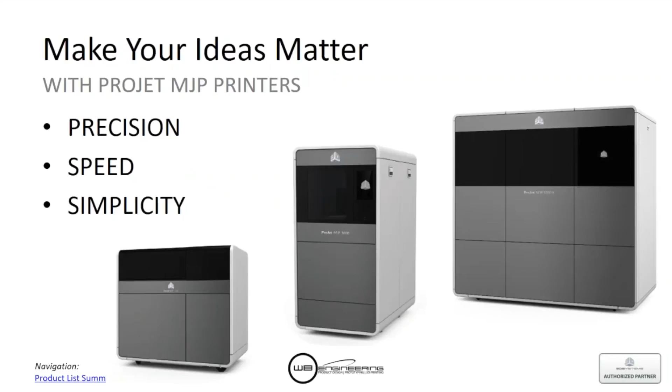So these are the three models that we're going to be going over today. These are known for their precision, the speed at which they print at, and how simple they are to use. Starting from the left, we have our ProJet 2500 series. In the middle, we have our ProJet 3600 series. And on the far right, we have our ProJet 5500X.

So we're going to start off with what's happening with multi-jet printers, right? Why would you have to use these kind of printers?

So we use it internally to help expedite our design process. The biggest thing we found is it accelerates our time to market. We can iterate very fast, innovate better. Therefore, if we have a meeting with one of our customers and they have some suggestions, I sit down with our engineers here and we can toss around a couple of ideas.

Even if we don't agree on the ideas, we can go our separate ways, 3D print them, and then come to the table with actual physical prototypes the next day to see which idea actually works better and then move on from there. The beauty of this is once you design it, the actual fabrication of the part is automated, so you don't have to worry about a machinist.

You don't have to worry about dedicated staff. You just simply do the design work you're already doing, but you get the goal at the end where you actually have a physical part that you can hand over to your fellow engineer to debate the pros and cons of each one of your designs and then move forward. So there's no real hands-on time and labor time that you have to really put into this. It's relatively insignificant.

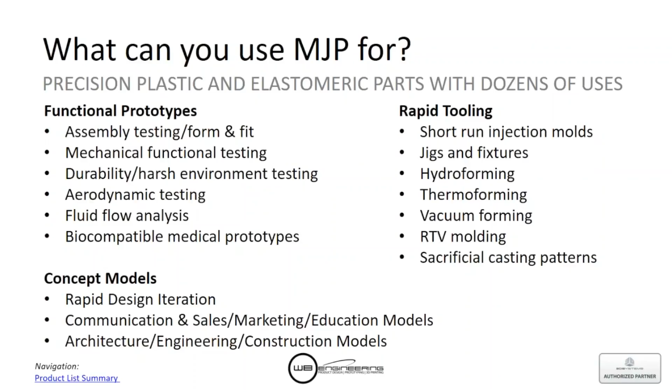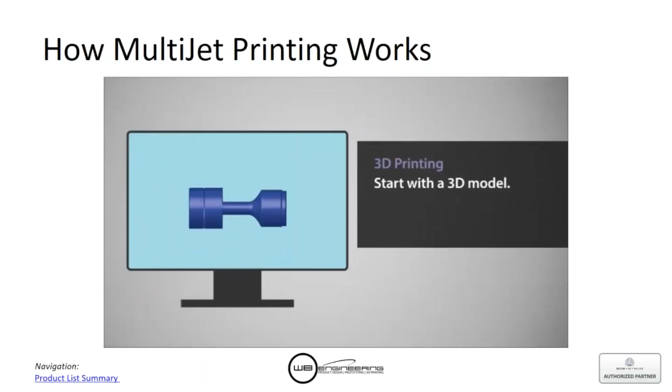Now, that said, there's always certain limitations. So I'm going to show a quick video on how MJP printing works. There's no audio to this, that way you guys can hear my joyful voice over it. But anyway, in general, you get your 3D file, you submit it to a modeling client.

It'll actually then split it up into layers. Once it slices it up into layers, it sends it over to the computer inside the printer. Then what it does is it actually starts laying down 2D images of each one of those, just like it would a 2D printer.

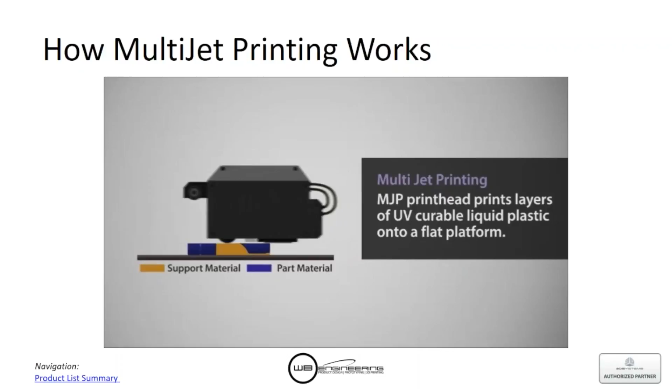We actually have over 600 jets inside of the print head, and it starts laying down part and support material as it starts printing. As it prints, the print head starts going up. In some of our printers, the build plate actually starts going down. So that's one variable there.

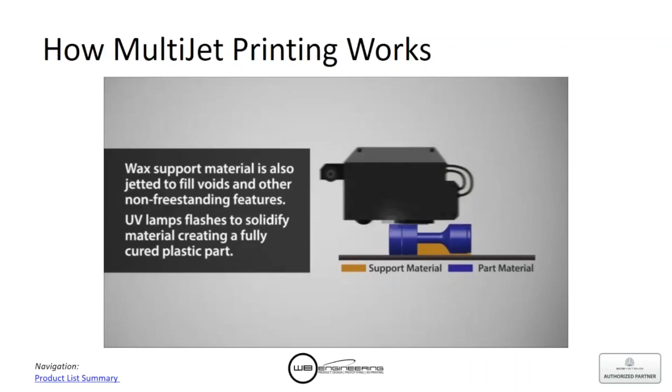So the support material in our situation is wax, and the blue material shown there is an acrylate photocurable resin. The good thing about this is that the acrylates come with different types of mechanical properties, also different colors if you need something that's clear. We have things that are ABS-like, polypropylene-like, etc.

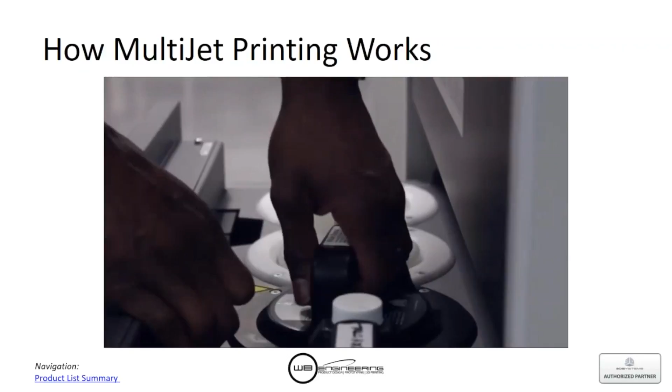Right here you're seeing how it is to refill your machine. You notice there's actually 4 containers there. This specifically is on the 3600. That's how you actually refill your machine and get rid of the old material.

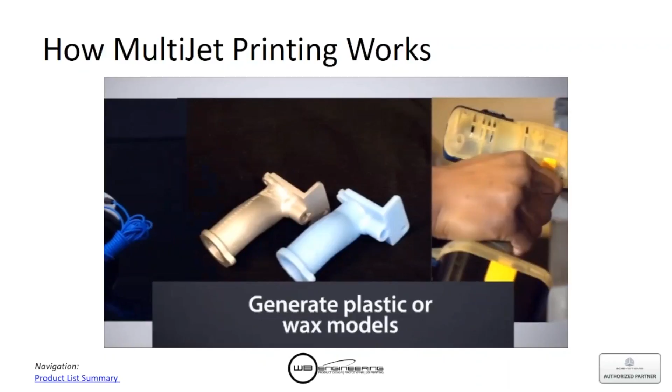This is actually a 5500 in action. You notice the white support material, the kind of amber-colored acrylic material. This is actually on a 3600, slightly different setup. In general though, you notice that we can do wax patterns and have them cast. We have functional, rigid plastic parts, and we can do very small, complex parts as well.

Okay, so what makes MJP better, right? So why are we looking at multi-jet printing over other types of technologies, right? So multi-jet printing is something that can produce extremely high fidelity parts. You can also produce very small, fine features, extremely easy to post-process, and you have more geometric freedom.

So unlike other technologies where you have breakaway supports, wash-away supports where you need to actually use pressurized water, all you have to do is put this inside of an oven and it actually melts away. So you're able to do very, very complex internal structures. You don't have to worry about overhangs, things like that. You're going to get the same accuracy and surface quality on any type of geometry that you send to this machine, which is incredible.

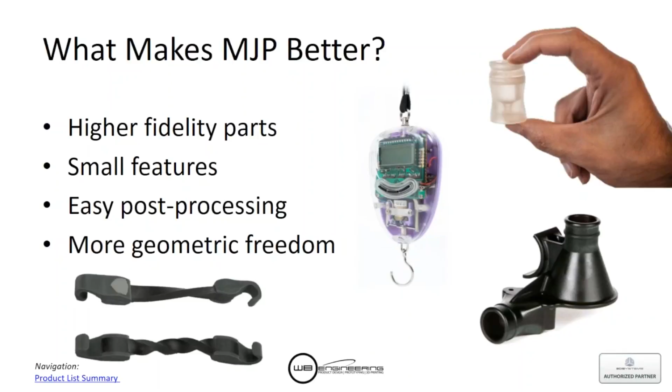Next up is us compared to other jetting technology, right? So if you notice the holes inside here, you'll notice on the left is our multi-jet printing technology. On the right is what's called polyjet printing. There's a significant resolution difference between multi-jet printing and polyjet printing. I'll get into details as to why in a bit, but you can notice just off of this image

there's extremely sharp corners in our parts. All the edges are visible. You can even make very, very fine geometries. It's easy to post-process. All the support material is gone. So it's very, very good for very high-resolution applications.

This is another one that was taken off of a case study from one of the customers. They actually produce irrigation systems, and they needed to come up with a spray pattern. They actually had to go with a multi-jet printer over a polyjet printer because the polyjet printer was giving them false results. So this is actually what we would call a false negative. The person actually designed the part properly.

When they 3D printed it and the 3D print came out slightly out of shape from where it needed to be, the jetting pattern of the irrigation system was actually wrong. So it wasn't necessarily because the geometry of the design was wrong, it was because the 3D printer was not capable to produce the geometry that was needed.

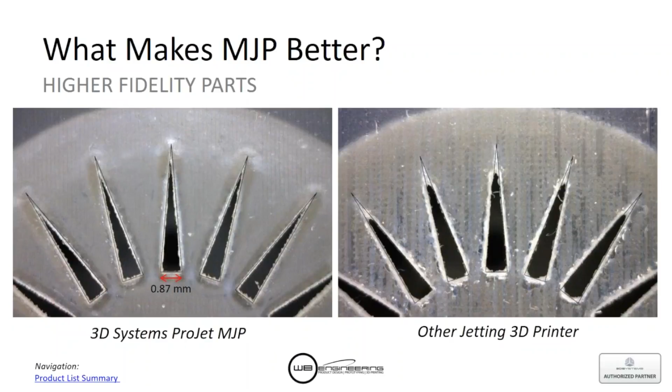So therefore, this fine detail, though it might sound like we're nitpicking, could mean the difference between false positive or false negative, which could be very, very detrimental to timelines and costs. So, you know, the devil's in the details, and therefore we try to embrace the fact that we can do very, very tight corners.

So how does our jetting technology do that, and compared to the other jetting technology, what's the issue? Well, we have what we call phase change material. So we have better droplet control. So this is an oversimplified diagram, but essentially when our material jets, it goes from a liquid to a solid as it's jetting. So therefore, we can control the geometry very well.

Whereas with the competing polyjet printers, they do not have a phase change material. So when the drop drops down to the build plate, the drop is actually not precisely controlled, and therefore not able to produce the sharp edges that we have in order to create that extremely high accurate part.

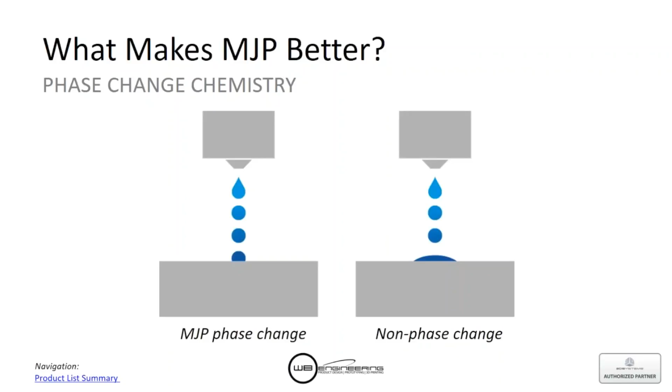So jetting is very important. We have phase change control, so the parts have very, very sharp edges, and our droplets are very well controlled because of the phase change process that multi-jet printing is able to offer over other jetting technologies.

Other reasons why multi-jet printing might be the choice for you guys. Post-processing, I got to say, is one of my favorite parts about multi-jet printing. Like I said, we've worked with a lot of different technologies here. Of all of them, multi-jet printing is the easiest to work with in terms of post-processing. Why do I say that?

Well, because in this scenario, it's hands-free, you don't have to worry about damaging the part. It's actually very fast. You don't require any type of plumbing, no chemicals, and we can do it in bulk as well, right? Let's compare that real quickly to other technologies. Simply, let's just talk about SLA.

Even if you're talking about professional level SLA systems or consumer level SLA systems, there's breakaway support, right, to one extent or another. The other thing is you have to put it through a wash, and then you have to UV cure it.

If you talk about FDM printing, or plastic jet printing, like 3D Systems would call it, there's also breakaway material, in some cases soluble, but the soluble is actually not what you would think, that you just drop it inside of a vat and it's done. It's actually overnight, and you might have to put it in an ultrasonic cleaner, you might actually have to scrub it after the fact, etc.

And now when you start talking about our other jetting technologies, those actually require water jets, some plumbing, so you do have to take into consideration certain things, and you also require chemicals for that as well. So in our scenario, you're simply just putting a part inside of a temperature-controlled oven. From that point, you just let it drip away, and you have a clean part. I'll show a video of that a little further on.

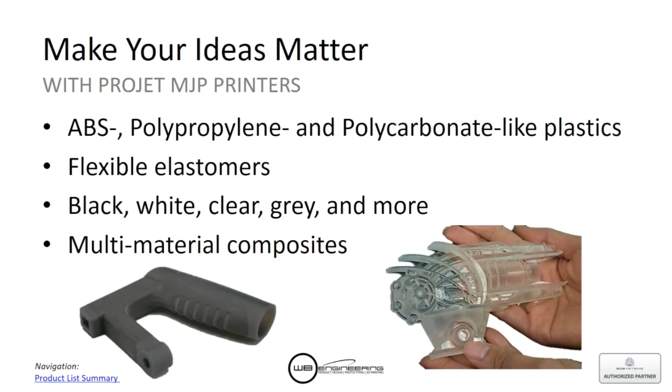So with ProJet printers, with MultiJet printers, you can actually create ABS-like, polypropylene-like, polycarbonate-like materials. We also have flexible elastomers, black, white, clear, gray, and we also have multi-material composites. So we can do 2 materials at a time, so that you can actually do, let's say, overmolding type applications, things like that. These are, again, the 3 printers in our line.

What I'm going to do is get now specifically into our ProJet 2500 series, which is this little guy over here on the left. This is our new product for the year. It's actually selling like hotcakes. It's very, very competitively priced. To create the type of precision that this printer actually creates prior to the beginning of this year, there's really no printer on the market that was sub 100 grand for that kind of quality. So this is really starting to bring the price point down on extremely high precision professional level printers that are built to last.

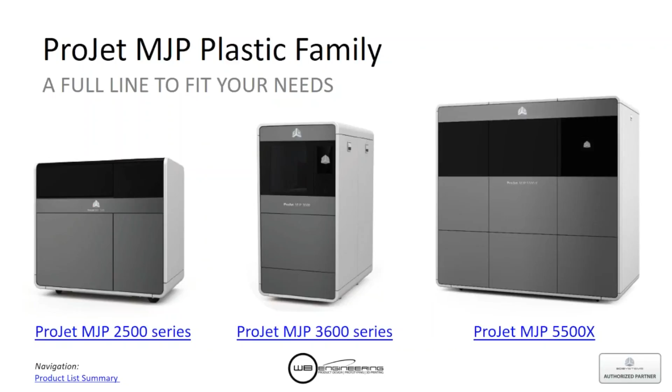So these are considered capital equipment purchases that will last you a while. So don't think of this as a printer that you're just going to buy and it's going to be obsolete in a little bit. These printers, they hold up to a beating. They're workhorses, and you can really run them hard without having to worry about them. So you get what you pay for. These are very well built machines that will last a good amount of time.

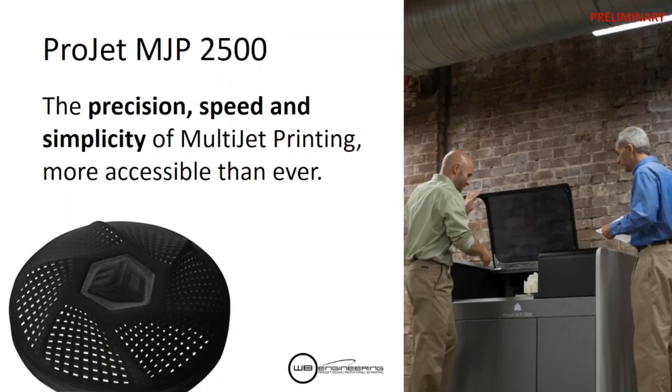So the ProJet 2500, best thing about it is it's almost as precise and accurate as our bigger systems. It has very high speed in terms of printing, and it's extremely easy to use, right? Let me show you a quick video from 3D Systems on this system in particular. That way you can see a little background about it. So that's a quick view of the 3D Sprint software. We'll go over a couple of the benefits of that software later.

That's the size of the printer. If you notice, it's about the size of a desk. It's quiet, so you don't have to worry about where you put it inside the office. As loud as it'll get is about the sound of a refrigerator. It's very, very clean. We actually have ours here in the office, actually 3 feet away from mine right now. So unless you have very good hearing, I don't think you can actually hear ours in the background.

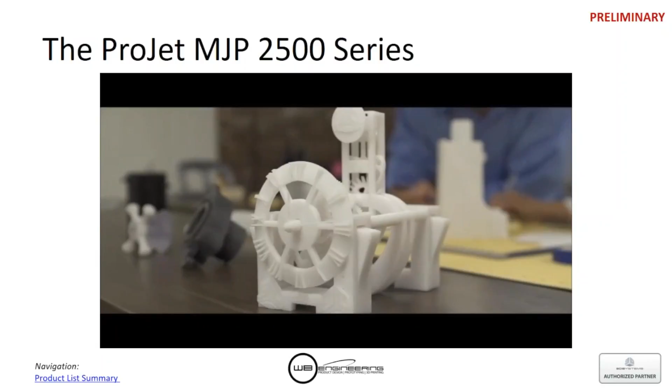So it's a very, very nice, quiet, clean machine, and it doesn't give off fumes. You don't have to worry about how it smells. Post-processing is very easy and clean as well, and the parts are very high precision, rigid or flexible elastomeric materials available for this. So what are the pros of the 2500? High resolution, high fidelity, and actually affordable.

So like I mentioned earlier, printers that create this kind of resolution and accuracy don't start to sell for very much under 100 grand, where the 2500 actually comes in significantly below that. So now you have access to what used to be a 6-figure acquisition at a significantly lower price, which is nice across the board. Even when you look at our competitors, you cannot get this kind of quality in that price point, period. The setup is very, very easy. I mean, it's comparable to, and even in some cases more simple than consumer level printers, right?

You can have this thing run 24/7, and it doesn't have to be taken care of. So, for example, a lot of the times what we do here, we'll have design meetings in the morning. We'll have our engineers implement those design changes during the day. We'll submit a print at night, and the next morning we have a meeting to review our parts. With this printer now, with the amount of speed that it has, if you have your file ready in the morning, in a lot of cases you can actually get it in the afternoon as well.

So these printers are actually starting to get to the point where you can literally have a morning meeting, and in the afternoon you can actually start to get some parts and look at them, depending on the size of the part, right? So we'll be honest with each other, if you have a massive part, it's going to take overnight to print. But if you're doing something that's really quick, small, you can actually get it in a very short period of time to review your decisions that same day.

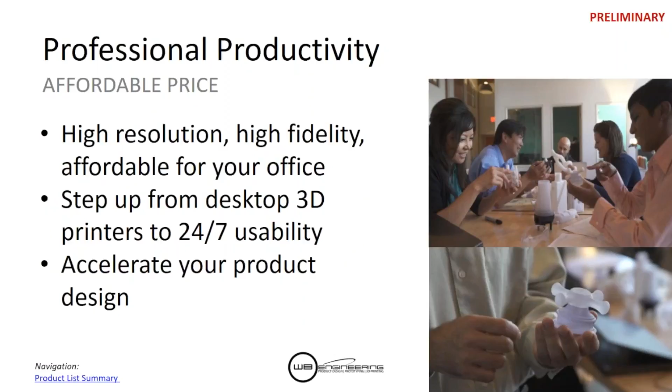Resolution, right? So in this scenario, I always like to compare this back to Apple, right? So Apple introduced the Retina display a few years ago at 300 dpi, which is more than what the human eye can actually notice, right? So we're actually printing with the 2500 at 790 dpi. So it has more resolution than the Retina display from Apple.

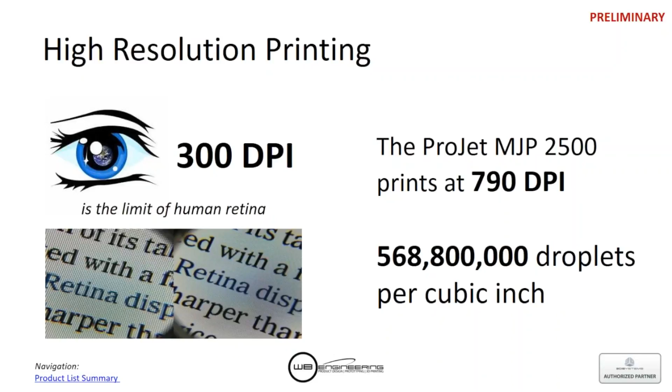So if you noticed when you looked at your screen as soon as you saw one of those Retina displays how crisp and clean that was, well, now compare it to something that's almost double what that Retina display was. So we're getting extremely high resolution, high fidelity parts out of these printers.

All right, next thing is network ready, right? So if you have a team of engineers that want to work on this, you can actually submit from your own desktop. It's a really simple client software that you can add to your desktop or your laptop. As long as you're on the same network, you can submit your prints from anywhere.

I actually have in the past been in my apartment, finished up a design, and submitted it from my apartment to get printed in the office. So it's actually pretty nice that you can do that remotely. If you're on the same network, you can manage queues, so if you need to prioritize certain prints, etc. So that's one of the biggest benefits that I see.

You don't need a dedicated PC either. So as soon as you submit the file, all the printer needs is power, and it'll go to the races. So it's not going to be taking up any of your bandwidth in terms of your computer. It'll be using its own processing power. You don't have to worry about the connection dropping between file transmissions or anything like that.

So some printers actually require a dedicated computer, and if that computer goes to sleep midway through a print, you all of a sudden lost your print, etc. With this one, you don't have to worry about that extra added variable, the issue that you might have to worry about.

Also, for the post-processing, you don't need any type of plumbing, and it's not dirty. Right? So you can actually literally put this in an office scenario, and you can post-process your parts. You don't have to worry about smell or fumes or anything like that.

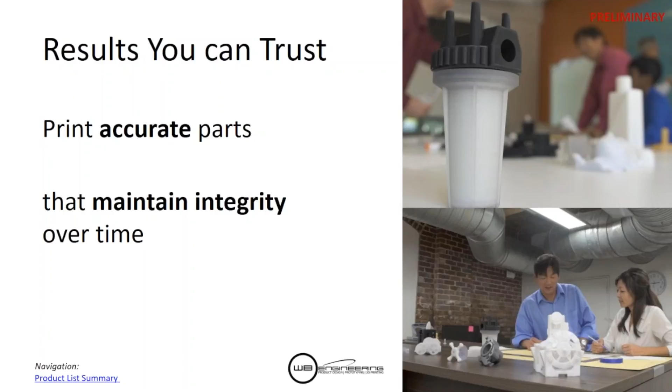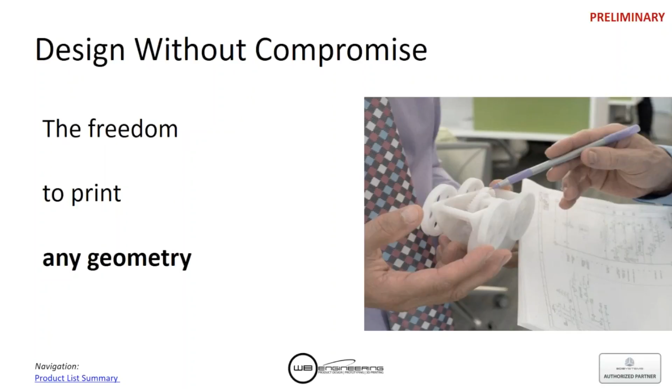So you have the geometry to print out. Any geometry, yes, but keep in mind there are some limitations, especially with architectural applications. You have to worry about when you scale an entire building down to 1/100th or 1/1000th scale - an 8-inch wall suddenly turns into paper thin. So in those scenarios you have to be a little careful. But in general, anything you intended to produce with mass production or any other form of fabrication, a 3D printer can handle very easily.

So what materials are available on these printers? With the Multi Jet, the ProJet MJP 2500, you have a rigid white and a rigid black material - those are the two top ones seen here. With the Plus, you open up the options to a clear material and two elastomeric materials as well. So the regular 2500 has the basics, and the Plus adds a couple more material options. If you need just high precision plastic parts, stick with the 2500. If you need clear or elastomeric, look at the Plus model.

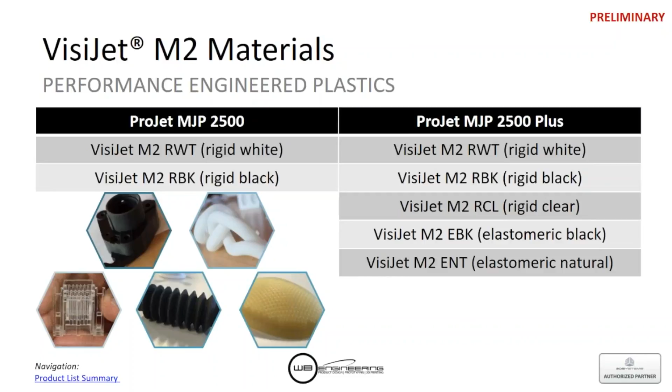Next, how do you clean these? This comes with what we call an easy clean system. It does things extremely quickly - you can post-process in under 30 minutes, and that's not 30 minutes of your time, it's 30 minutes of post-processing. You're literally just dumping the part inside here and coming back 30 minutes later. So don't think of it as 30 minutes of labor.

That's one of the biggest differences between our systems and competing systems, or other technologies outside of MJP - it takes time and labor to post-process parts. In this scenario, having worked with a lot of different technologies, this is the one post-processing method that doesn't require a lot of hands-on time or learning curve.

For example, with FDM prints, we have to worry about breaking off support without damaging the part, or sanding down dimples that are too big. With SLA, we need to clean the parts properly, put them in a UV finishing oven, then break off the materials. With color jet printing there's powder involved, same with SLS - you need to bead blast and clean off the parts. With multi-jet printing, it's literally easier to maintain than my HP printer, where sometimes paper gets jammed and I have to ask one of the guys in the office to help.

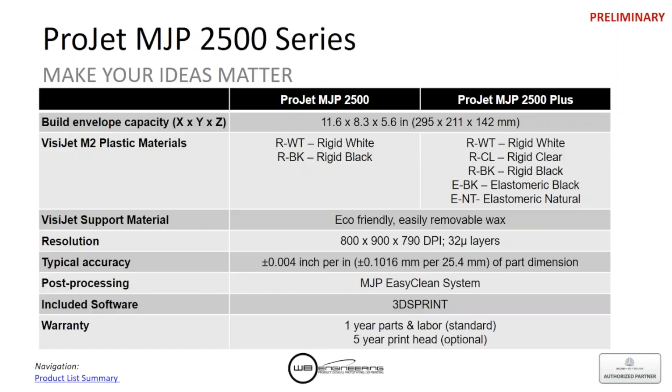And the print head is large. In this case, the print head is slightly more narrow than the build plate, so it does have to do 2 passes. On our other systems, it's just as big as the build plate, so if you're printing out 1 part, it takes 1 hour. If you're printing 100 parts, it takes 1 hour and 10 minutes. So it's not a huge incremental add-on in terms of time as you add more parts. I actually encourage waiting to the end of the day and submitting all your parts at the same time, so you take advantage of the build time all at once. It's not like FDM or other technologies where 1 part is 1 hour, 2 parts is 2 hours. Here, you get a small incremental increase, if anything, when you add parts.

So now moving on to our 3600. Sorry, I kind of glazed over that slide too quickly, but why would you want to go with a 3600 over a 2500? This is more investment, and the build volume is a little bit bigger, but why spend the extra money? Because you want more material options and a little bit higher resolution, and maybe a slightly bigger build volume.

I'm not going to say the part quality is night and day between these two, because the 2500 has very, very good part quality. When you get to the 3600, you have slightly better part quality. This is when you really need high precision parts and want the best that's on the market. Then you start looking at the 3600, because we can get the sharpest corners, the smallest holes, and the tightest tolerances that you can, period, on these machines.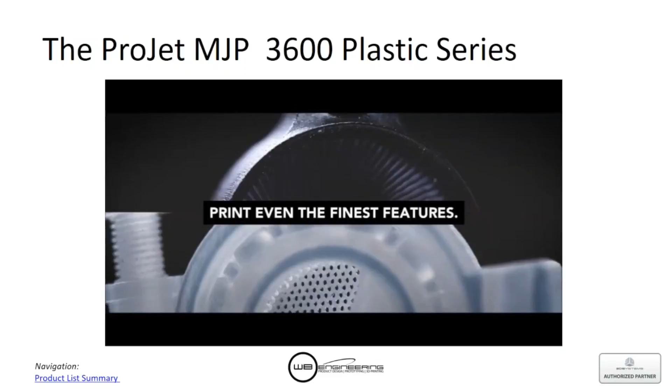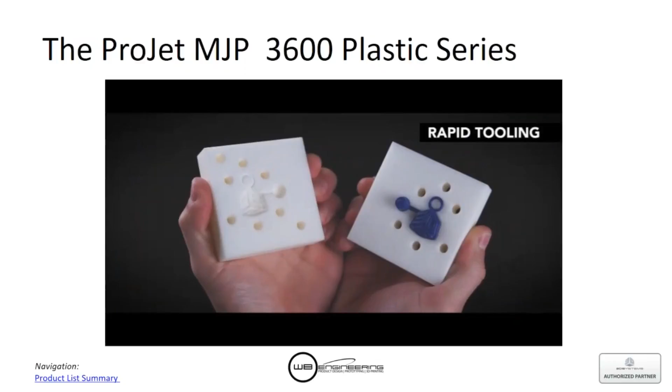The printer produces extremely fine detail parts. You notice here we had a very thin impeller part in there that one of our local customers did, the blue part there. They actually used that part to then cast it - that's an injection molding application. So I'll get into what the materials for the 3600 are and why you might want to look at this over the 2500.

So why the 3600 then? Again, the bullets are basically the same: high fidelity, high precision. This has the finest details and a superior surface finish over the 2500, and also other jetting technologies that are out there.

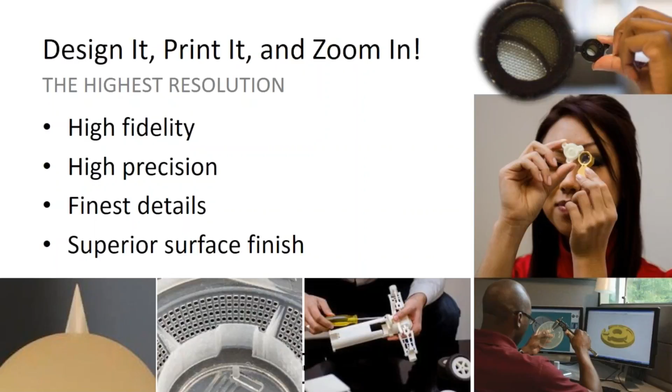Job submission and post-processing is very, very simple. You notice the image on the top right, the GIF, showing how the parts are post-processed. You just simply put it inside of a temperature-controlled oven that has a drip pan underneath it. It's sold by 3D Systems as well.

We also have other options that give you the ability to put it inside of a steam bath, which is an easy clean option that melts out the part a little bit faster. But essentially, you just put it inside of an oven, let it melt off, and you see the wax just basically drip out. What we do after the fact is get a lint-free cloth to dab it off, and then your part's good to go.

The bottom right is actually the build volume. You notice how you can nest all the parts in there, and it's only going to take as long as your tallest part. So if you have one part or ten, the same size, it's relatively the same build time. As soon as you start increasing that vertical height, that's where you can actually start adding build time to your print. So try to orient your parts so they're lowest to the build platform, because this is additive manufacturing—the more layers it has to put down, the longer it's going to take. That's just the way it goes currently.

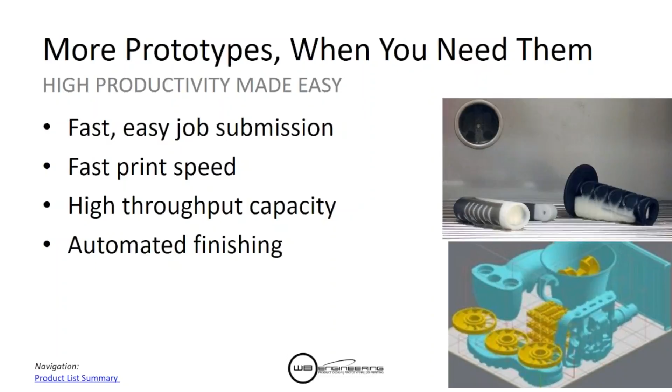Next thing is, now we're talking about high throughput, right? So we have really fast printing times on this with extremely high resolution. This is at our UHD mode, talking about 27 micron layers—very, very thin layers—and we can actually build this entire build plate in 7 hours. If you go to the 2500, you can do it in 11. Compare that to other jetting technologies, and you're talking about almost or more than double in one scenario, and almost double in the other. So you have very fast throughput.

I always like to keep my builds under 12 hours. The reason being is because you submit it at night, and when you come back the next morning, you want your parts to be ready and good to go. When you start getting over the 12 to 16 hour range, now all of a sudden it starts eating into 2 business days, and that's not what you want a 3D printer for. You want, worst case, your parts the next day. In some cases, you want to get them the same day.

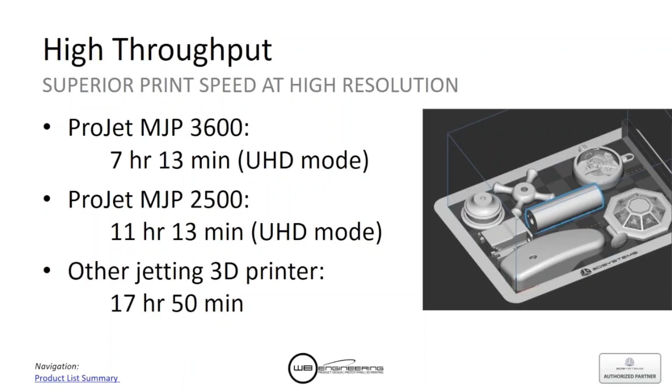Now with the 3600, it opens up your applications to a little bit more than what you had on the 2500—basically looking at the bottom 3 blocks here. You'll notice that now we have high temp material, so now you can start using injection molding type applications where you can print out the mold and inject it with the specific plastic or elastomeric material that you want.

A lot of the objections I get on a day-to-day basis trying to sell 3D printers is, well, my end part isn't plastic, or I need exactly ABS, not ABS-like, or I need exactly polypropylene, or this exact TPE, whatever it might be. Not a problem. Now that we have high temp materials, you can 3D print the mold like you would have to machine out of metal, and then inject it with the material for a test. You like it? Okay, good. That mold's going to hold up for quite a few cycles while you're machining your steel mold for mass production.

So this can actually even be used for bridge manufacturing. Optimize, optimize, optimize until you get to the mold that you like. All right, well, let's use it off of the 3D printed part while we machine the real deal that's going to be working for us in the long run.

The next detail here is castable. We can actually print parts, depending on the printer you're looking at—whether it be our 3600 that has a castable acrylate material, or if casting is the only thing that you do, we also have a real wax 3600 that will print directly in wax, so you can cast your parts the same way you do regular wax parts without any type of learning curve. With the acrylate, there's a slight little learning curve there.

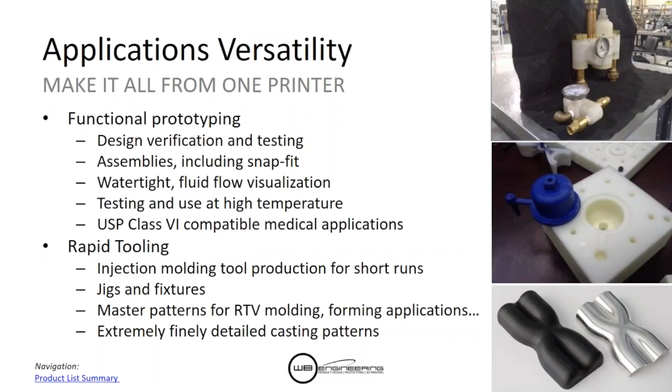So your applications start opening up to a much broader range. The other thing is low cost of ownership. With the 3600, this comes standard with a 5-year printhead warranty. You don't have to worry about it going down or breaking anytime during those 5 years. Labor is included, parts are included.

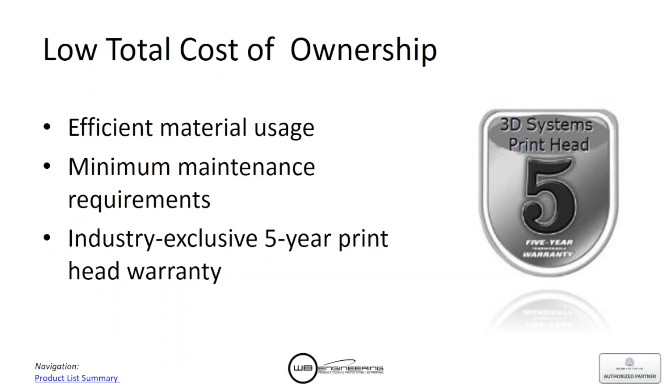It's going to be fully supported, so you don't have to worry about buying printheads every year like you would with competing technology. Minimum maintenance, I'm telling you minimum maintenance, because it is minimum maintenance. We have consumer level printers and other printers that require a bit more maintenance, but these are basically maintenance free. It maintains itself, so you hit print, it goes through a cleaning cycle, starts printing your part. Then all you have to do is clean the build plate, which means getting a razor blade, scraping it off, and reusing the build plate. You're done, you're good to go. So maintenance and ease of use is huge on this printer.

Again, one more bullet point here: we have versatility. You can do injection molding, casting, things like that. So you add a little bit of versatility to your design once you get over to the 3600.

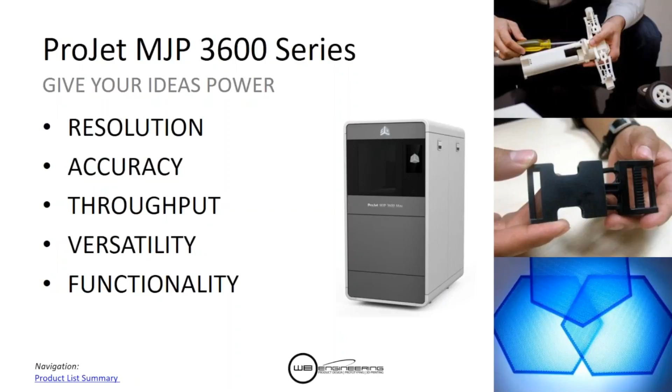A little bit of stats on the 3600, notice the build plate is slightly bigger: 11.75 by 7.2 by 8. When you have the HD Max version, you have that build volume through all resolutions. With the standard 3600, you get a slight build volume decrease when you go up in resolution. Materials are available for both units, so you don't have a difference in material options like you do with the 2500. All materials are available on both 3600s.

Here are the layer thicknesses - and I'm sorry, I think I said 27 microns before, it's actually 29 microns for UHD. HD is 32 and XHD is 16 microns. So if you have really extremely fine detail that you need to hold up, you can go to that 16 micron layer. Typically in-house we don't go below 29 microns, just because we do injection molded plastic, and that is, in a lot of cases, more precise than our injection molded part is going to be.

So we stick to the UHD mode, and in a lot of cases the HD mode, because it's more than precise enough. Typical accuracy is plus or minus 1/1000th of an inch, 1 to 2/1000th of an inch of build.

Post-processing is done with a temperature-controlled oven, like you saw in that quick video, and then standard warranties: 1 year parts and labor. So the first year, literally just purchase the machine and everything's going to be taken care of. Every year after that we do have a service contract through a reseller that we offer, and beyond that, the printhead is included for 5 years off the bat.

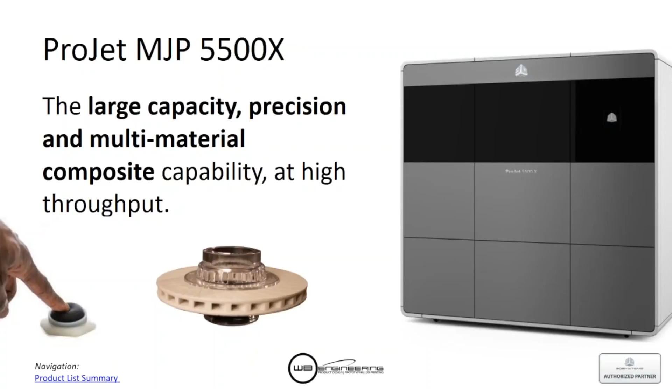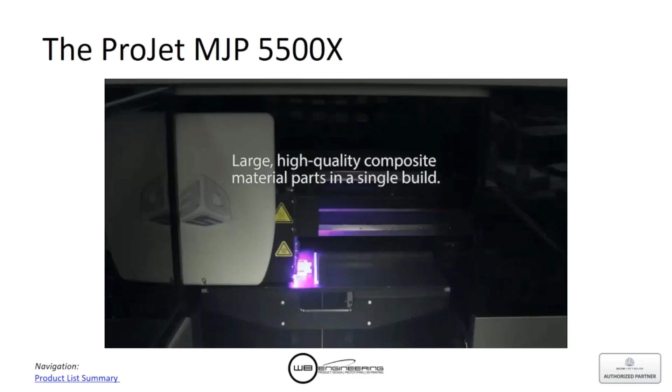And then now the 5500X, which is our flagship MJP printer. Now you can actually start doing multiple materials at once, and this is multiple materials at once for a very competitive price with a huge build volume on top of that. So let me go ahead and hit print on this one, that way you guys can see the general size and process that goes on with the 5500X.

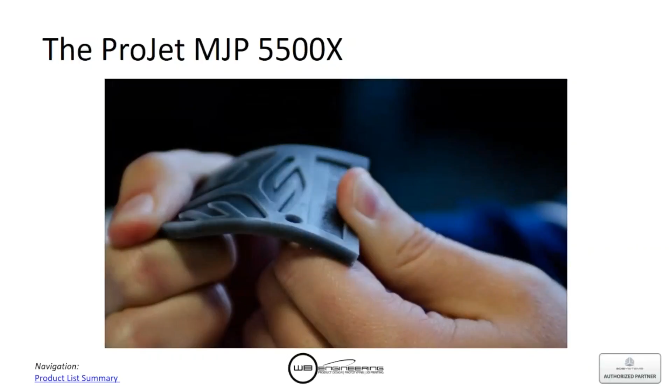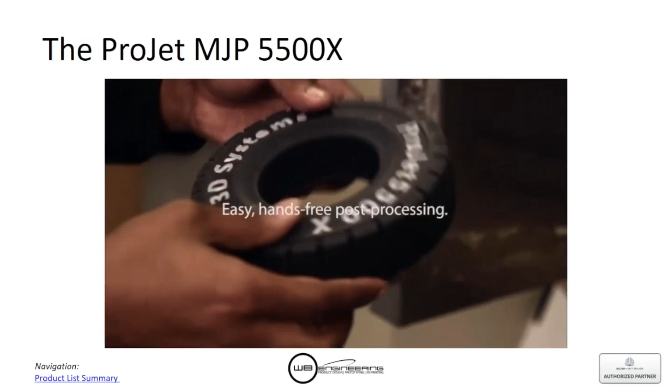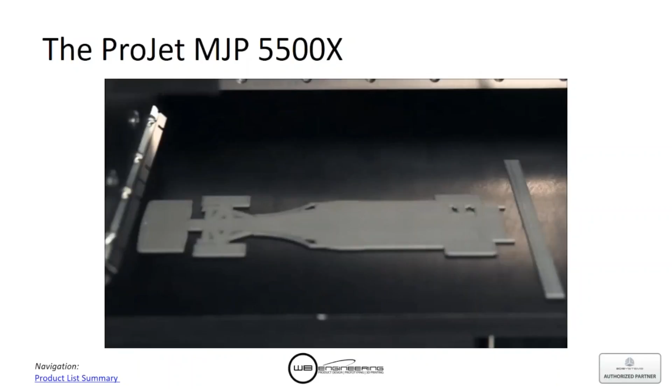You'll notice in this printer you can actually do multiple materials in the same print. You have flexible materials, rigid materials. You can even do complex assemblies like that camera there. Even tires that you want to put some labeling on the outside, whatever it might be. I think overmolding is one of the best applications for this printer. Whether you're Gillette or some other manufacturer that has grips over your plastic parts, this is a great 3D printer to test those things out with. Gaskets, seals, things like that are great as well. So you can really start working with your printer quite a bit.

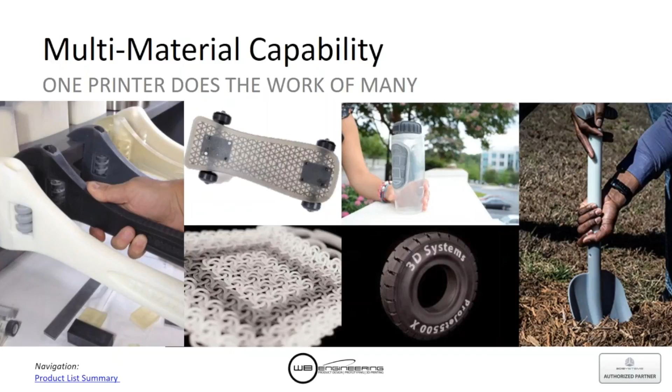You'll notice here that we have clear applications, soft, rubber, rigid, so you can actually start to broaden your horizon in terms of what you can expect. These are the materials in general. We have our rigid clear on the left, which is actually printed with an overmolded rubber grip. Second from the left is our rigid white material, which was again 3D printed, overmolded with the rubber-like grip on the bottom.

This is actually off of a case study called Derby the dog, so if you want to look up Derby the dog, it's really cool. It's a dog that was born with a mutation in his two front legs, and now the dog has these prosthetics which are 3D printed, which is a pretty nice story.

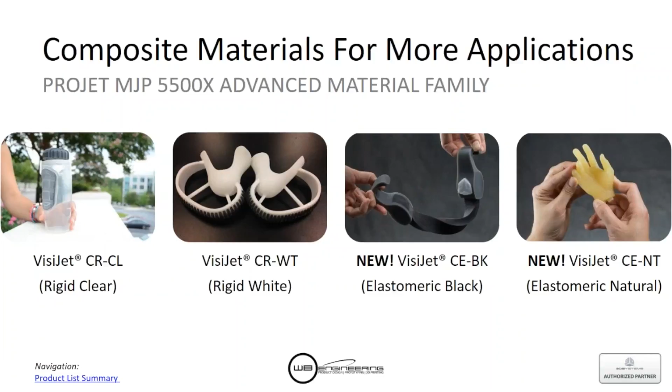We have extremely elastic material, so compared to the other technologies, our elongation is incredible, and it actually recoils pretty nice. This is a real quick video to prove how elastic and resilient this material is. This is, I believe, a 20-pound weight that they put on the bottom of this. This is printed on the 5500X. That's actually just a print of Derby the dog. We're going to show the video of stretching and then how it actually comes back.

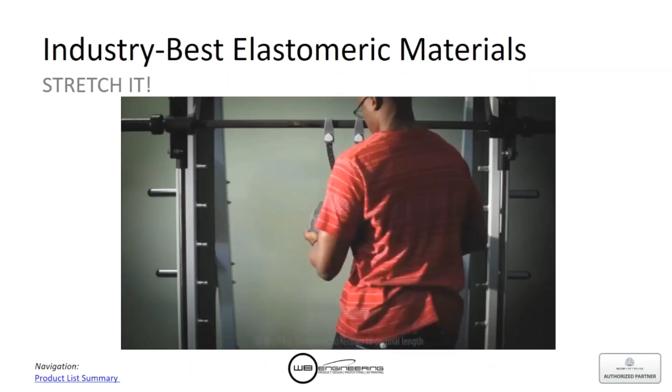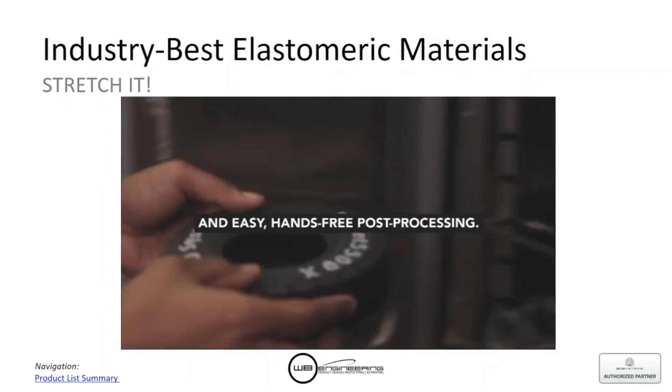So the elastomeric material is not what you've probably seen before, where it's actually kind of brittle. In this scenario, it's not, and it recoils back really well. It stretches very well, comes back very well. It's not going to plastically deform on you after you stretch it once. It's not going to be a flattened out piece of rubber. It'll actually come back with a very good memory.

Okay, so material properties. So how do you do this? You can actually create an almost limitless amount of durometers here. It's a very analog kind of setup. You have flexible, rigid, and you have black, white, and clear. Our black material is a flexible material. Our clear material is rigid. White is kind of polypropylene-like.

So you can create a wide variety of different material properties, which is nice because let's say you want a higher durometer grip on something and a softer durometer area on another. You can do that all in the same print without any material changeovers. So you can really dial in the Shore A hardness you're looking for. This is a good example where you can put multiple materials on the same build plate.

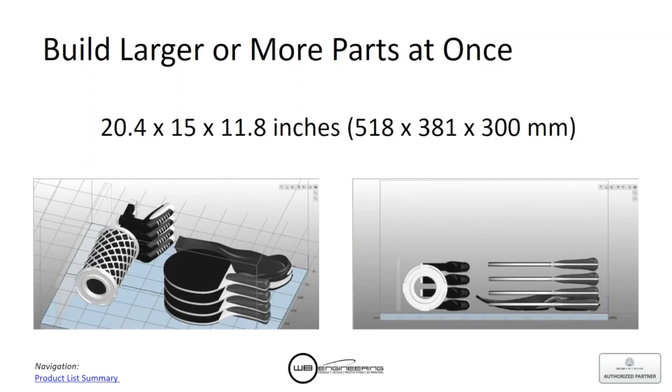The build plate is actually extremely large. I think it's almost 50% bigger than the competing technology, so we have an extremely large build plate in comparison to the competitors out there. Also, the build speed is very fast in comparison as well. So you can use your printer for large parts and get them quickly as opposed to waiting several days.

This is an extremely large part right here. It covers almost 21 inches across one side of the build plate, and I believe it's somewhere around 6 inches tall. This part takes 18 hours, so it's an overnight build. It's probably going to eat into your next day a tad bit, but with other technologies you'll be talking about 36, 48-hour prints, which gets extremely time-consuming when you're trying to get something this size with a high level of resolution.

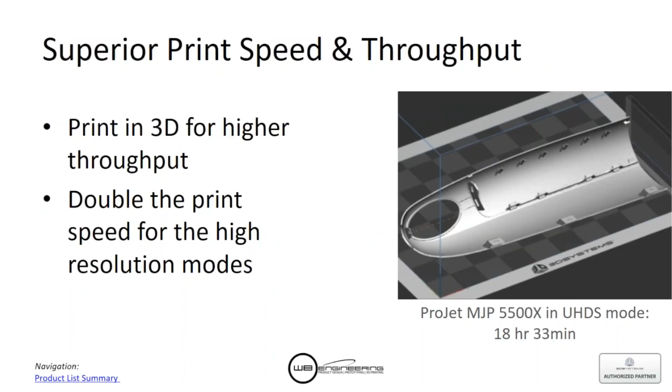The next thing is versatility again. Medical modeling is actually getting pretty big. This is good because it has different material properties. They've been 3D printing the anomaly in one material and the regular anatomy in another so they can practice their surgical applications. You have very small, clear, high-precision plastic parts as well, just like this. It looks like an old-school emoji, but I think it's actually to check your blood sugar. I just remember those little digital dolls from when I was in school.

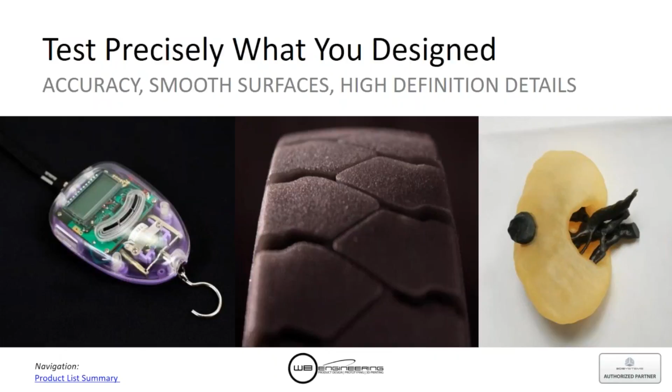Okay, again, low cost of operating. When you compare this to other PolyJet, MultiJet technologies, the competing technologies cost quite a bit to run. You have a lot more waste when it comes to support material. This prints out very efficiently. You don't have to worry about print heads, so your cost of ownership is significantly less.

Your cost for material is slightly less as well, so you're investing less, you're spending less over a period of time, and you get extremely high resolution parts. So it's really nice to see that after you purchase the machine, it's not going to run you into the ground.

It's actually relatively inexpensive to run. And also the cost of running this machine starts to diminish to near nothing when you start to consider how much you would have been spending on CNC machining, outsourcing, things like that. So take into consideration how much you are currently spending on machining, prototyping, how much time your machinist is actually taking, what you can actually be doing with that machine other than this part that you can just be 3D printing without having anybody on it.

So take into consideration not just how much does my part cost, think about opportunity costs. What could you be using your other equipment for instead of prototyping? Or if you don't have any equipment, how much are you going to be paying somebody down the street to do this for you when you can actually just hit print?

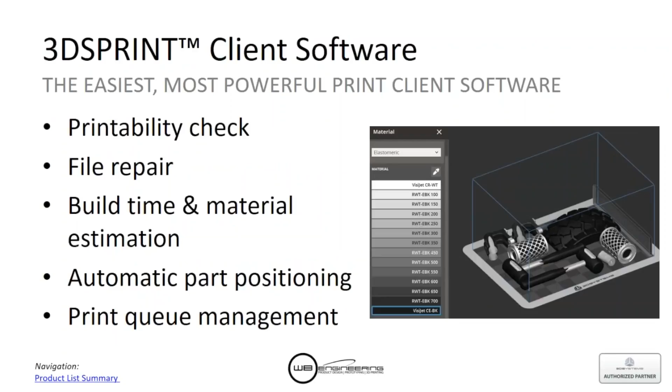Again, the 3D Sprint client software. This goes over basically the same things. This is synonymous to what the 2500 has, except now you have the added material selections or different types of durometers that you want to put into the materials. Accuracy, again, the bullet points are basically the same. In this scenario, you have high throughput, right? So you have a very big build volume. It doesn't necessarily have to be just for big parts.

If you have a run of small parts, for example, we have a medical device that we were developing for a customer. He needed biocompatible parts, and he needed 200 parts in a matter of 3 days. Luckily, the part was relatively small. We were able to fit all 200 parts on our MultiJet printer and have them to him the next day. Things like that are just not possible if you're CNC machining or injection molding.

There's setup time, there's manual labor involved. We literally just had to get the part, make an array of the amount of units that he wanted, and hit print. The next day we had all the parts ready to go for him. So quick throughput is key with 3D printing.

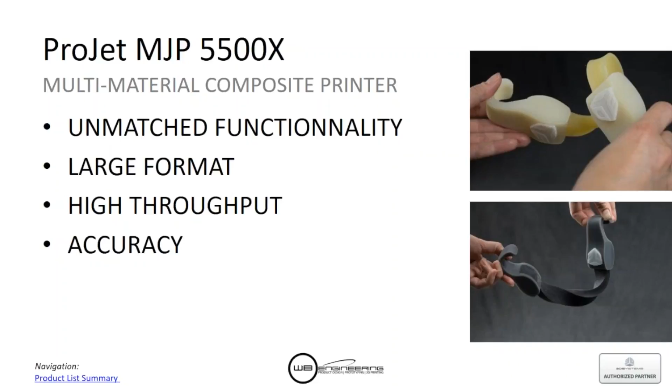Again, specs on the 5500X. We have a large build volume, 20.4 by 15 by 11.8. Multiple materials and the same high resolutions that we have on the other one. In this scenario, our HD mode is actually higher than our UHD mode on the 3600, so you have higher resolutions on this one. You can even go down to our XHD, which is 13 microns, extremely high precision. Again, same accuracy, 1 to 2 thousandths per inch. Post-processing is the same, and here you have the standard warranties again.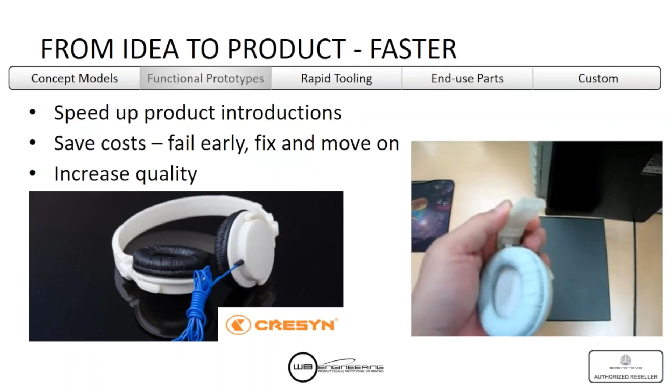This is a functional prototype, so it's really fast to check early on before you go to injection molding. The good thing is you can prototype with confidence. These parts are going to be one-to-one with your CAD, and in a lot of cases they can even be more precise than your injection molded parts. That's where I say be careful, because if you don't do your mold flow analysis and you go to injection molding, your injection molded part is going to come out warped, where your 3D printed part is going to look fabulous. So just make sure, now that you're running into 3D printers that are extremely precise no matter what you throw at it, that when you go to manufacturing, manufacturing does have some limitations.

So I'm sorry about the audio.

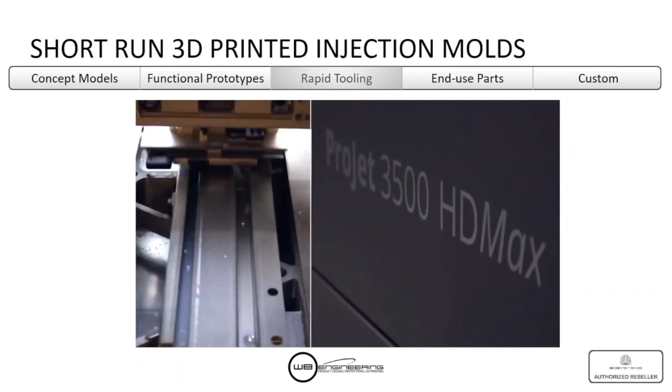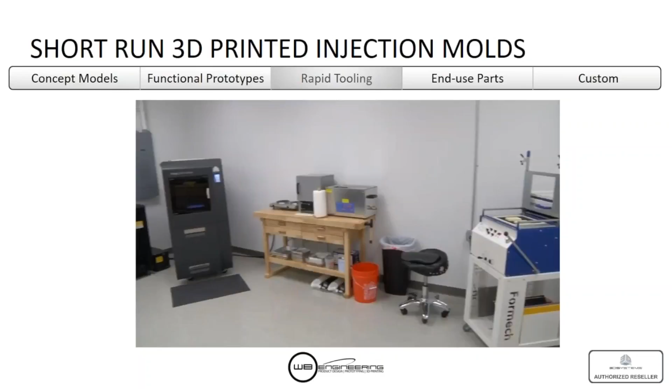This is a gentleman that uses injection molding. They create 3D printed molds and then injection mold them. He's talking about how a typical injection molding time would take 2 to 3 weeks and $6,000 to $7,000 to deliver a part, where now they're doing it in 12 hours, and they're able to turn around parts in a matter of 72 hours.

So they get the file, they 3D print the mold, then they start injection molding, and then they ship it. From the day they receive the file to when the customer actually gets the part in their hand, it's 72 hours for injection molded parts, which is pretty insane if you ask me.

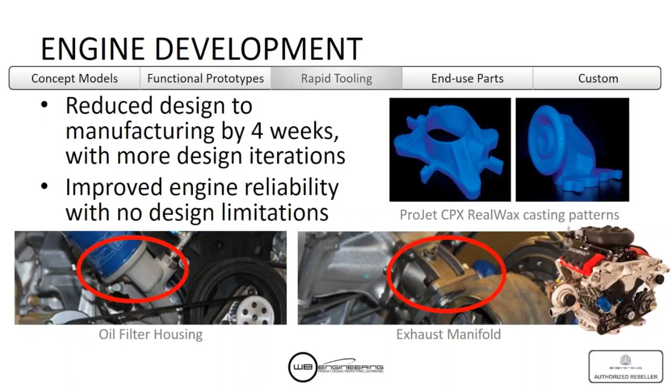This is off of one of our RealWax printers, so this is a 3600W printer. So they actually print it out in wax, and then they actually cast the part to be put directly onto a Honda motor. So this is something that typically would take 4 weeks, and now they can get it done in just a matter of a few days.

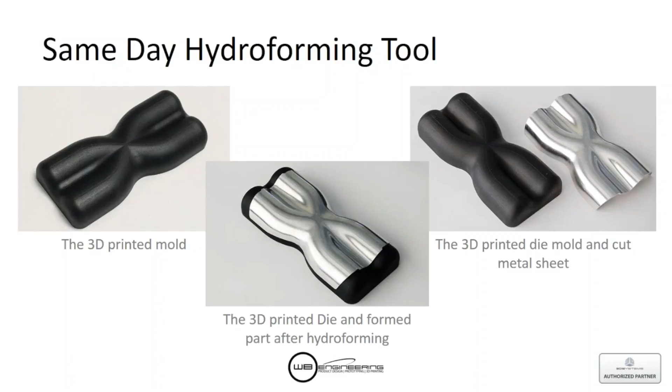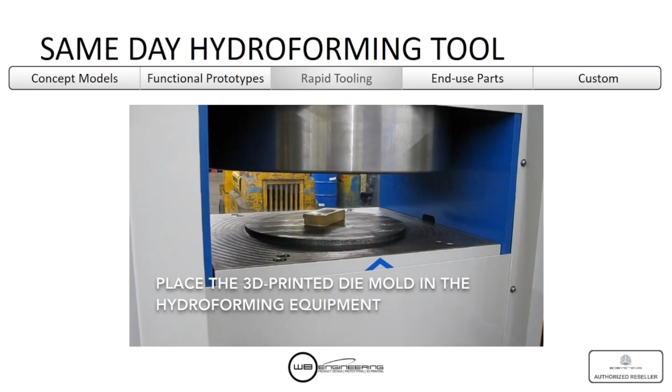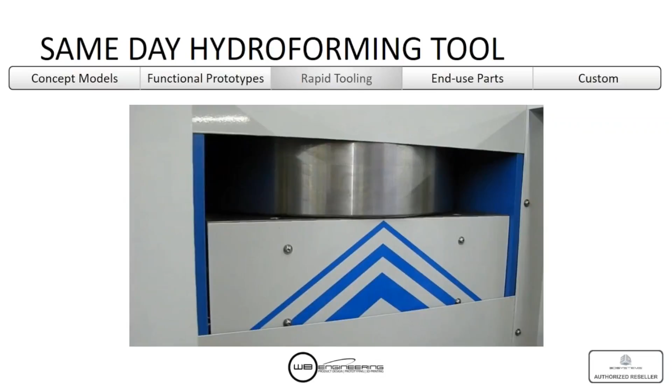So you can do same-day tooling on the 3600. Well, this is 3500. This video is from our preceding printer, which was almost exactly the same as the 3600, except the 3600 now prints twice as fast and has a couple improvements in terms of user interface and software. So you notice in here they got the block printed directly off of the printer, then they put it in a hydroform machine, and now they actually have an end-use part.

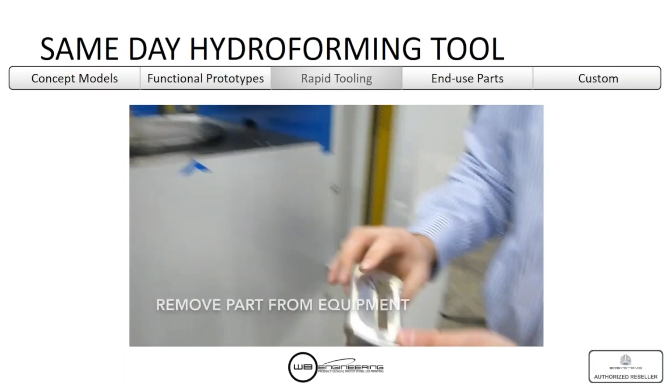And they actually, I believe in this scenario, they used it over 100 times. They didn't see any wear on the actual part itself. So as you notice now, 3D printing is not just plastic parts. It's actually real end-use parts.

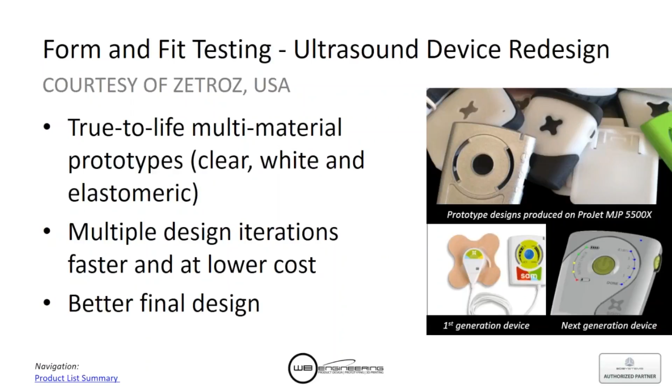This is an example off of a 5500. With the 5500, you can actually make end-use kind of prototype parts where you can use multiple materials, do some field testing, etc. So you can actually see your part and see how it works out in the field prior to getting any type of injection molds made.

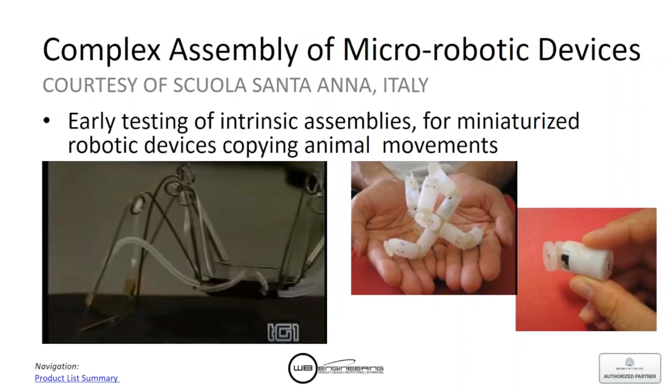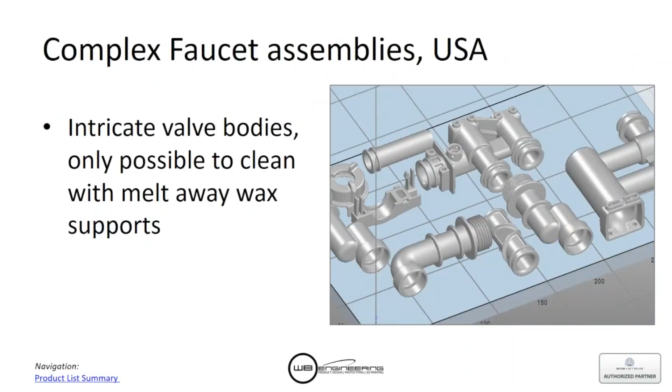Really complex, small robotic parts. This is something that was done in Italy, where they made a grasshopper out of 3D printed parts, which is kind of cool. So you can do very small, complex parts very, very easily. Intricate valves, right? So this company had to do valves that were watertight, the only technology that you can use for that kind of stuff. Other materials absorb or just don't hold that well.

Okay. The next thing is, with all of these printers, you can do RTV molding, hydroforming, thermoforming, vacuum forming, fiber layups, sand casting. So there's a ton of different applications. We're actually working with a customer right now that is looking to purchase one of these printers for sand casting applications. They do iron parts, and what they do is they'll 3D print the part, they'll put it inside of a sand cast, and then they fill that sand cast with iron. So even if you have high temperature metal applications, 3D printing could be applicable there.

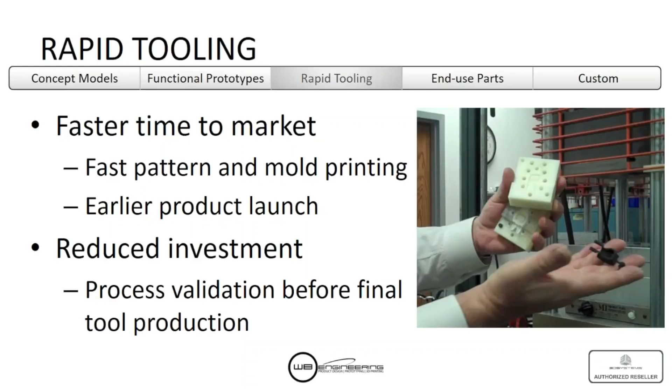This is again the injection molding process, which I think is huge. It's going to change quite a bit in terms of highly customized parts and products without the need to sell 100, 200,000 units to be able to justify the cost of your mold. Now you can just 3D print the mold and you can have short run, highly customized parts. So I think this is going to be a huge market for 3D printing.